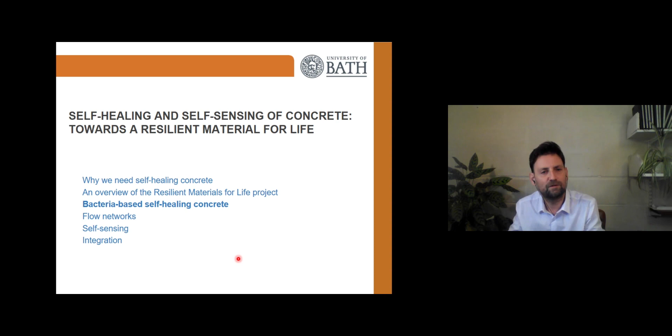So the title of my talk is Self-Healing and Self-Sensing of Concrete: Towards a Resilient Material for Life. The general content is as shown here. I'll start off with describing why we need self-healing concrete. I'm going to give an overview of the Resilient Materials for Life project from which a lot of this work has arisen. I'll talk about bacteria-based self-healing concrete, something about flow networks, self-sensing, and finally integration of self-healing and self-sensing. The bacteria-based self-healing concrete is shown in bold, as that's the main topic of the presentation, and the majority of what you'll hear is based on that.

Whilst I'm giving the talk today, I really don't want to proceed any further without making mention of the team at Bath that has been working on this area for the past 8 years through Materials for Life and Resilient Materials for Life. Some of the names on this slide will come up throughout the presentation, and certainly nothing that I'm presenting today could have been done without them. Essentially these 17 researchers are the co-authors of this presentation. Shown here are the academic staff, postdoctoral researchers and PhD students that have been involved with the research at the University of Bath. But even on top of this, there are many undergraduate and postgraduate taught students who have also contributed to this work on self-healing and self-sensing of concrete through their research dissertations.

So to start off with, I thought it might be useful just to define the problem. Why do we need self-healing concrete? Obviously concrete is weak in tension, and due to a number of reasons, it may well crack during its service life. This then permits the ingress of harmful compounds such as chlorides or sulfates that can cause longer term and serious deterioration of our concrete structures.

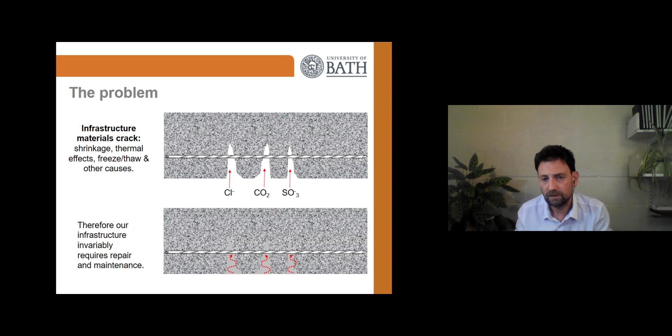Of course, you'll say, well, we know that, and that's why we maintain our structures, and we do invariably repair them from time to time. But I want to ask, do we really do that effectively? I'd suggest not, because repair and maintenance of structures has problems. Indeed, current figures for the UK, where I'm based, show that at least half of the construction budget is spent on the repair and maintenance of mainly concrete infrastructure, and that's around about £50 billion every single year.

But furthermore, these costs are compounded when the cost of disruptions, closing roads, closing railways, and other delays are considered. So the actual cost associated with repair and maintenance can actually be 10 times the actual figure of the repair itself. But actually, it's even worse than that, because the problem is many cracks start off small, so they're not spotted until they grow larger.

So there's been many years in which harmful substances have been ingressing into the concrete before you've even noticed that there is a problem. And then, even once you've noticed that there is a problem, you can't just go out and repair the crack, because it may not have been budgeted for. So you've got to wait for the client or the asset owner to make that money available, and again, that means many more years, perhaps, when these substances are ingressing.

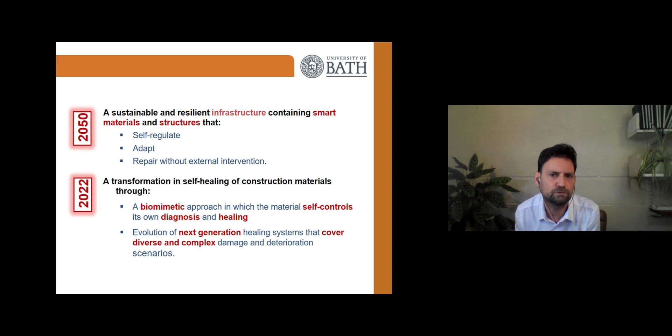Just waiting for the next slide to load up. Yep, there we go. It's got a video on it, so that's why it's taken some time.

So that's the RM4L programme grant at a much higher level. We've also had a short video created for us, aimed at the non-expert, which explains what we're doing in a rather more fun way. So we'll just show this for now, and hopefully it will play.

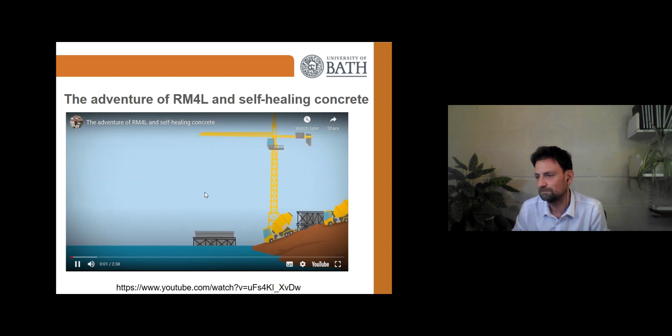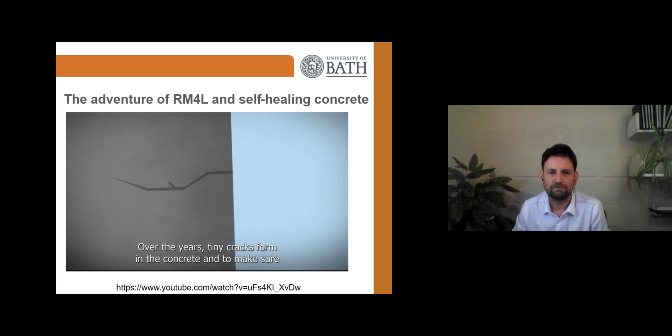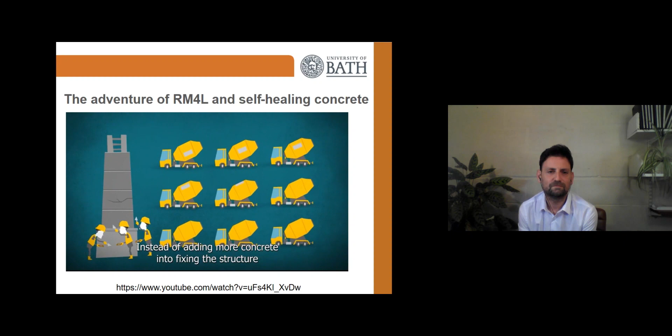One of the more polluting productions in the world is concrete structures. Over the years, tiny cracks form in the concrete, and to make sure the structures don't collapse, there is a need for even more polluting concrete production for maintenance. Researchers from Cardiff, Bath, Bradford, and Cambridge joined together in an adventure called Resilient Materials for Life, RM4L, and they came up with an interesting idea: instead of adding more concrete into fixing the structure, what if the concrete would fix itself?

RM4L is developing four main types of self-healing concrete methods. In the first method, microcapsules containing a healing agent are mixed into the concrete. If a crack forms, it will rupture the capsules, releasing the glue-like agent that will glue together the microcracks from within.

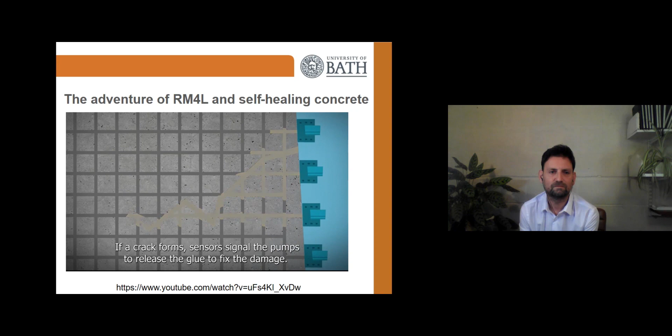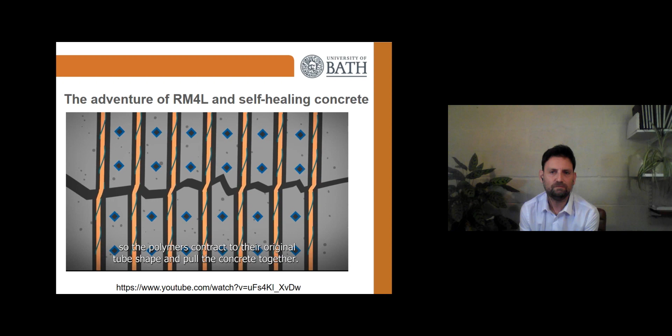The glue agent is also used in the second method. Tunnels are built into the concrete with glue pumps attached to its side. If a crack forms, sensors signal the pumps to release the glue to fix the damage. The third solution is a shape memory polymer shaped into tubes and built into the concrete. If a crack deforms the tubes, sensors placed inside the concrete will detect the damage and activate the polymers by heating them up, so the polymers contract to their original tube shape and pull the concrete together.

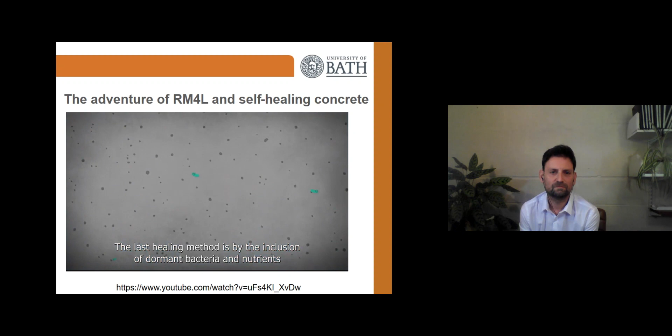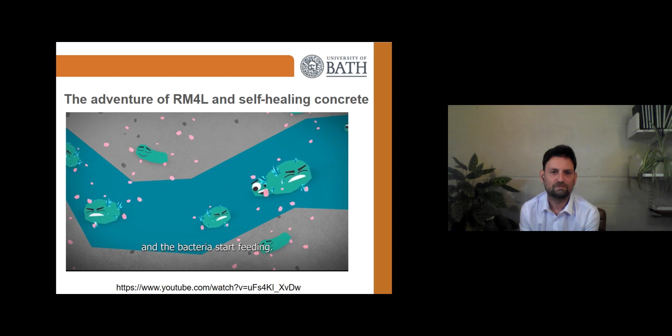The last healing method is the inclusion of dormant bacteria and nutrients in the concrete mix. If cracks form and water penetrates the concrete, the nutrients are dissolved and the bacteria start feeding. This results in the precipitation of calcium carbonate by the bacteria and leads to the sealing of the cracks. The bacteria can also heal historical buildings and monuments. Self-healing concrete could be one of the solutions of tomorrow to reduce concrete-based pollution.

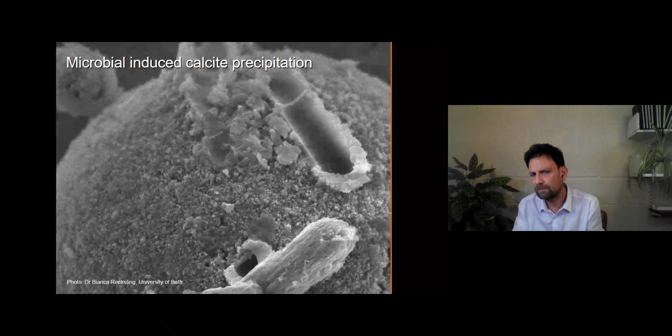Moving on from the video, as I said, at Bath we've largely been exploring this latter aspect related to bacteria-based healing. So I thought it might be useful to say a little bit more about how encapsulated bacterial spores work, how they can be optimized, and how they actually provide self-healing, given it's the area we've been working on so intensively. I'm going to explore some quick examples of work we've been doing, involving the fundamentals of bacterial growth, healing in colder conditions, some aspects of genetic engineering of bacteria, and a look at the availability of the growth media.

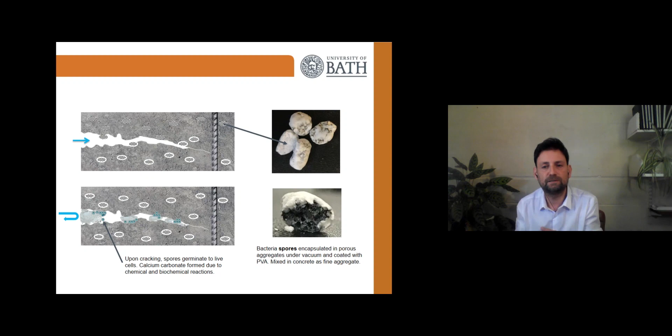Use of MICP for self-healing is fairly straightforward using bacteria. Essentially, we mix capsules into the concrete, and these capsules, often porous aggregates for simplicity more than anything, contain bacterial spores, and in some cases can also contain growth media. The general concept is that the capsule is roughly the same strength as the concrete, so should the concrete crack, the capsule will also crack, and at that point the bacteria spores will be released. Because of the bacteria chosen, they're released into an environment conducive for them to germinate, and they will then induce the precipitation of calcium carbonate through a series of chemical and biochemical reactions.

I'll briefly explain these chemical and biochemical reactions, as the use of bacteria does create some fear in the eyes of some concrete technologists. But it's really quite a simple process at one level. Essentially, bacteria are negatively charged on the surface, as I've tried to show here. This yellow blob is a bacterium.

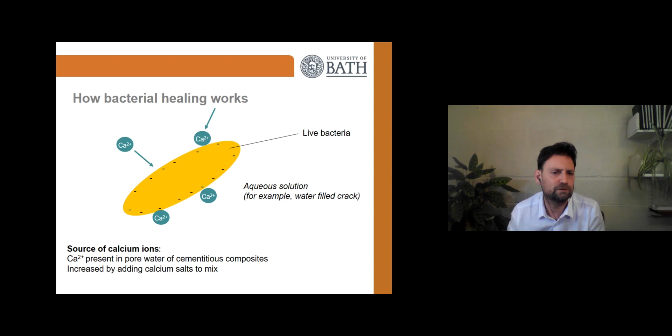They will attract free calcium ions in the concrete pore solution to their surface. Of course, there are many calcium ions in concrete. But we can also increase the number, and therefore facilitate greater healing, by adding further salts such as calcium nitrate to the mix, should we wish.

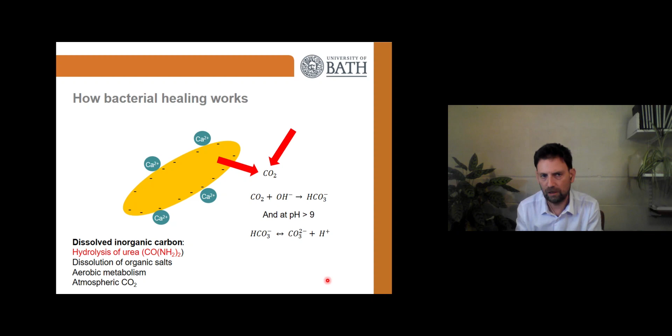In addition, the bacteria themselves are aerobic and will release CO2 into the concrete as a result of their metabolism. But we can also increase the amount of dissolved inorganic carbon in the concrete by adding organic salts, urea, or culture media. The addition of urea is important here, as only some bacteria, which we call urealytic bacteria, are able to break urea down. So you end up with two separate pathways: the urealytic pathway that uses urea, and non-urealytic pathways. I'll be exploring this a little more in a few slides' time.

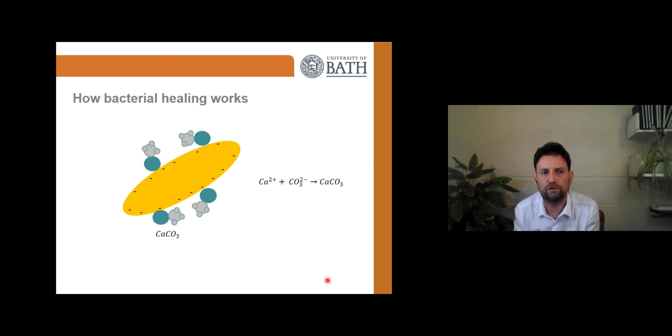Whatever the pathway, the presence of calcium and carbonate ions in the vicinity of the bacteria, which then act as a nucleation point, leads to the formation of calcium carbonate, normally in the form of calcite, on the surface of the bacteria, as shown in this image here, which you've already seen, but I didn't annotate it last time.

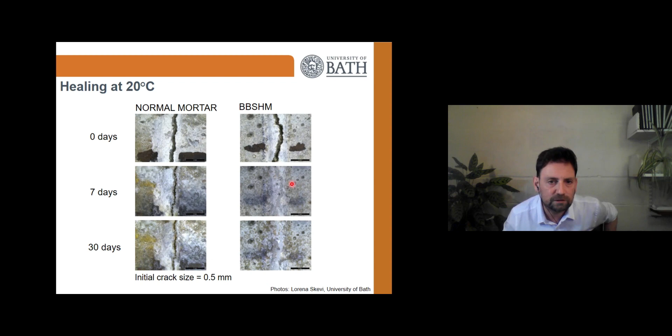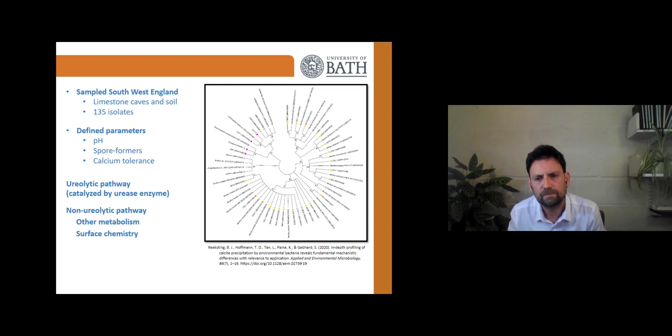Within those areas, we targeted spore formers that could tolerate alkaline conditions, typical of concrete. We also tried to distinguish our bacteria into ones that had ureolytic capability and those that didn't. This allowed us to investigate which pathway was most relevant to our self-healing applications. We investigated the kinetics of calcite precipitation and the total amounts of precipitate we could form, and correlated this to bacterial growth and changes in pH.

Perhaps more importantly, we saw that the ureolytic strains produced a much finer and more homogeneous powder than the non-ureolytic strains. This is consistent with the idea that they were probably formed purely as a result of saturation kinetics changes, whereas the non-ureolytic strains had large organic components embedded in the precipitate.

In terms of self-healing of concrete, however, which is what we were genuinely interested in, both the ureolytic and non-ureolytic bacteria were capable of closing cracks in the concrete. But interestingly, we found that the non-ureolytic bacteria, at least in the conditions we tested them in, worked slightly better, which was to some extent a surprise. But it has meant that this is the pathway down which most of our research has proceeded.

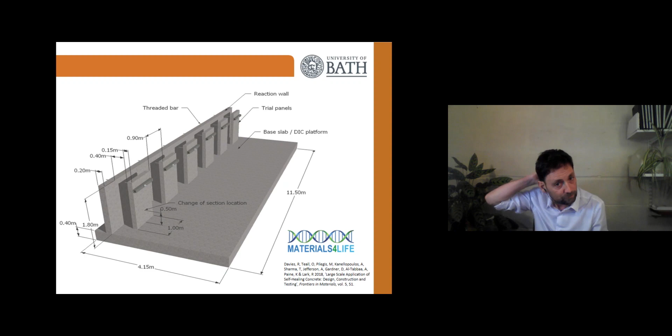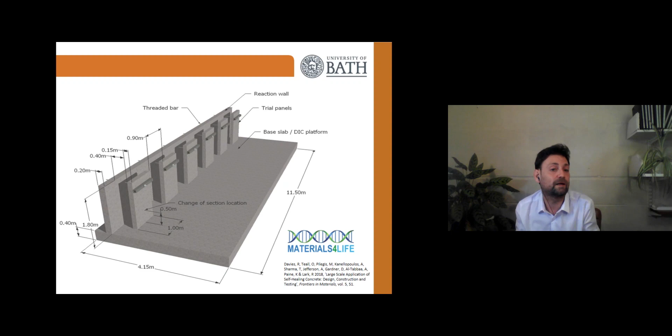As part of the earlier Materials for Life project, the M4L project, we were required to undertake a site trial to demonstrate that bacteria-based self-healing concrete would work in practice.

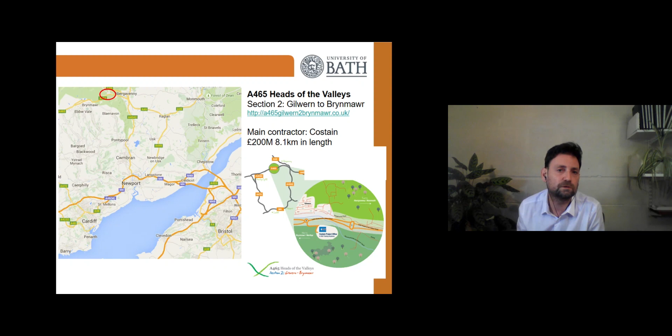The site trial took place in South Wales, in the west of the United Kingdom, and was carried out with the help of Costain, a major contracting engineer, as part of a major upgrade to an important link road, the A465 in Wales.

We did the work in conjunction with our colleagues at Cardiff and Cambridge universities, who were testing some of the other technologies I've already mentioned. Altogether, five walls were made, and one of those was used for our bacteria-based self-healing concrete technology. This wall is 1 metre wide, 1.8 metres high, and 150 millimetres thick.

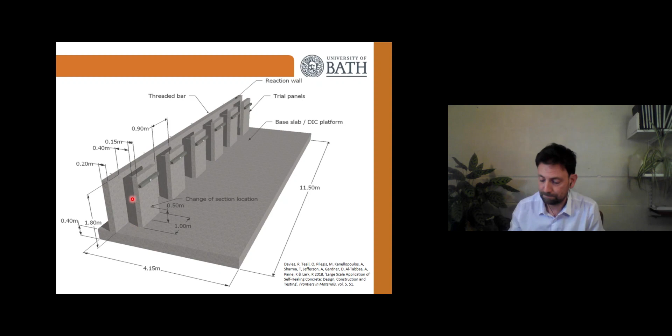Following a number of lab trials, we developed a concrete with the required design strength, appropriate consistence, and one that adequately provided self-healing in laboratory conditions. The mix proportions we used are shown here.

The self-healing component, of course, is coated perlite containing growth media or nutrients, and coated perlite containing spores.

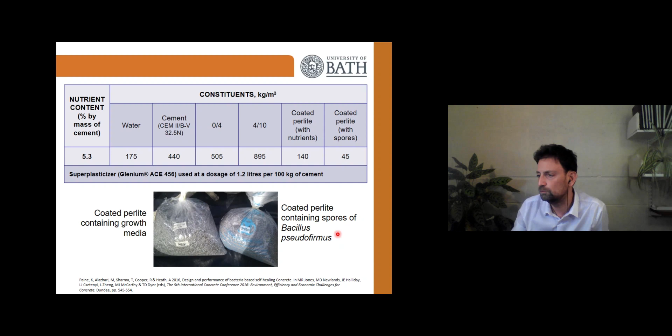The growth media was a mixture of calcium acetate and yeast extract, whilst the spores we used were Bacillus pseudofirmus, or at least they were known as Bacillus pseudofirmus at the time. I've noticed they've now been recently renamed Alkalihalobacillus pseudofirmus.

These spores were embedded within perlite, and the perlite itself was coated with a double layer consisting of sodium silicate and cement paste.

I think the only other thing to note about the mix proportions is that the cement we used was a CEM II/B-V, meaning it was a Portland fly ash cement.

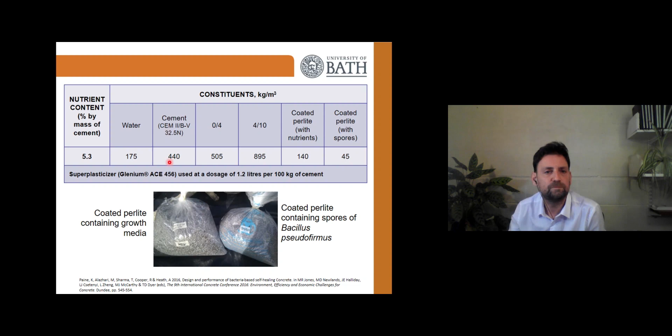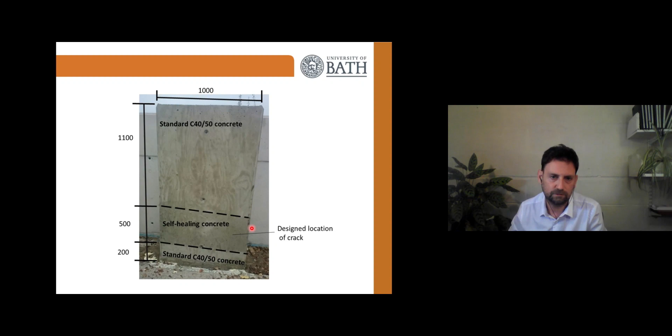Due to issues with actually making a large number of spores, we didn't necessarily have the scale-up capability at the time. We decided only to add the bacteria-based self-healing concrete in the area of the wall where we knew the crack would form. This was a section 500 millimetres in height, 1 metre in width, and again 150 millimetres thick, but we knew the crack would form somewhere just there.

I think this is important because, in general, what we were trying to avoid was this being simply another university lab trial where researchers have done this thing and it looks really good. What we wanted to demonstrate was that this was something that could be done on site, and that there was no reason self-healing concrete technologies could not already be available and done by contractors.

So therefore the vast majority of the work, other than the actual mixing of the bacteria self-healing concrete, was done by contractors from Costain and by a ready-mix concrete supplier.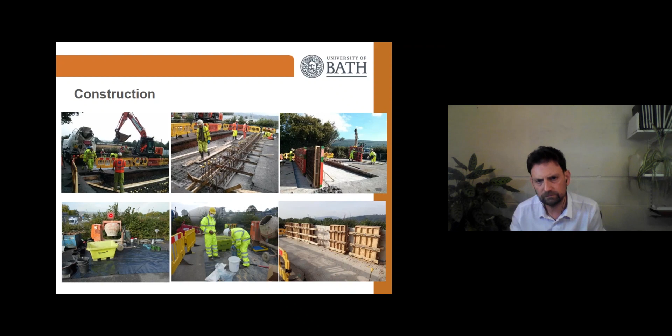This slide shows the finish that we achieved. In my view, and obviously I'm biased, but in my view the finish of the bacteria-based self-healing concrete here is better than that of the normal standard concrete provided by the ready-mix concrete producer. And that's either because I'm brilliant at making concrete, or it's because the self-healing agents improve the consistency.

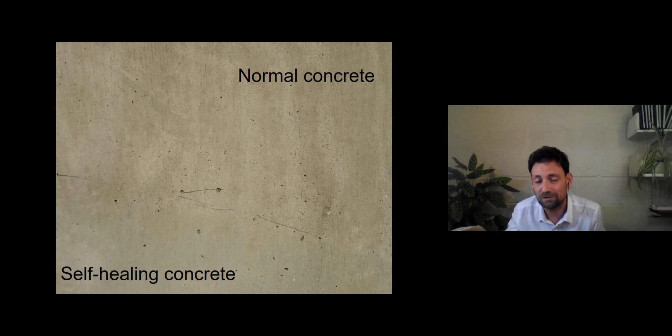Probably the latter. But this is important because when you tell engineers and clients that you want to add bacteria to their concrete, one thing they often worry about is what's it going to look like, what are the aesthetics. Clearly, the aesthetics of self-healing concrete are not a problem. It looks very nice, as good if not better than normal concrete.

So 28 days after we cast that wall, and the other walls at the same time, they were all deliberately cracked. This is different from many case studies on self-healing concrete, where they make self-healing concrete but never actually crack it, so you never see whether it will self-heal or not. In our case, the walls were cracked, then left to heal, whilst being monitored for 6 months.

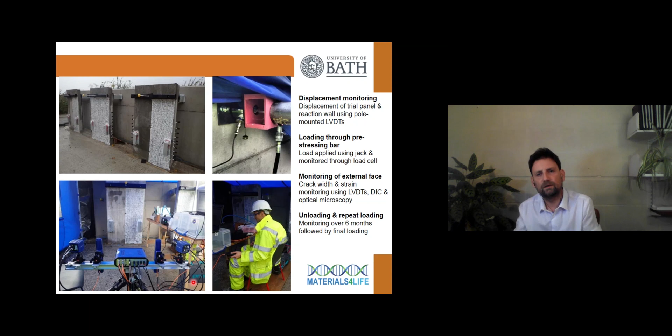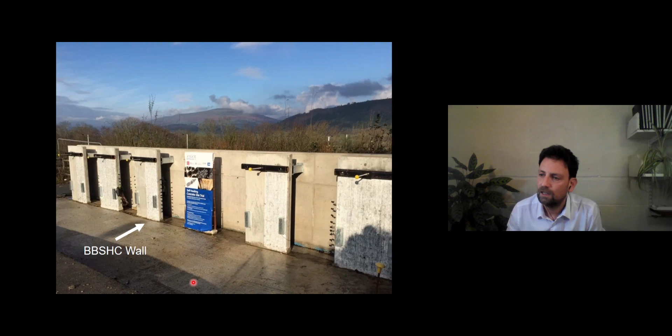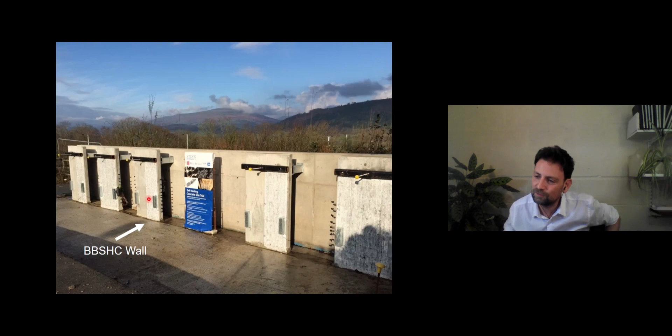Since the wall was cast, actually I haven't told you this, but it was cast in October, so it was then left for 6 months, exposed to a South Wales winter. And South Wales winters are wet and cold. This image shows the walls on a fairly nice day, but you can still see the crack there, and we were hoping it would heal.

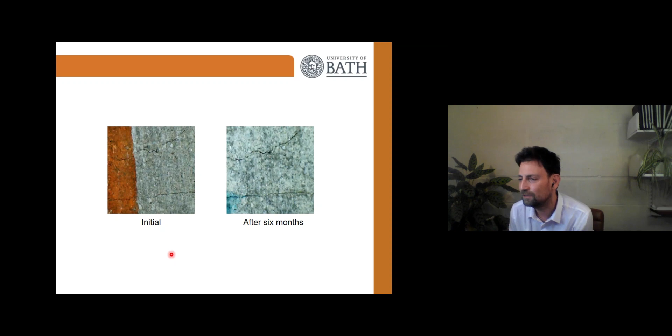After 6 months, we came back to see if all the cracks had healed, and oh dear, that doesn't look great, does it? The cracks are clearly still visible and don't appear to have closed at all. So what had gone wrong?

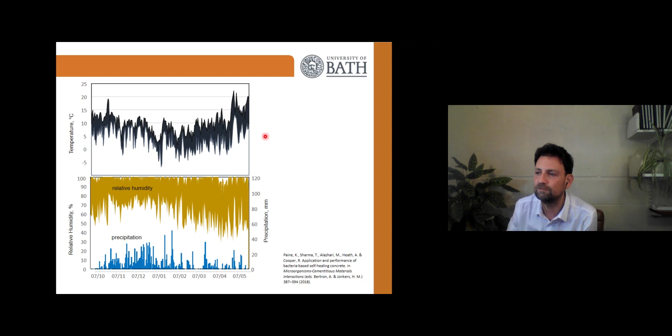Well, our chief suspect was temperature. Indeed, the average temperature throughout the site trial was around 7.5 degrees centigrade. And clearly a potential issue here was that we had used the mesophile Bacillus pseudofirmus, as many groups around the world do. Let's not forget, our use of that bacteria in the lab had been absolutely fine.

All concretes we'd made in the lab had self-healed. However, the problem with mesophiles is that in general they're not active below 15 degrees centigrade. Therefore, clearly in hindsight, and hindsight's a wonderful thing, it was never going to work in a wall in a South Wales winter.

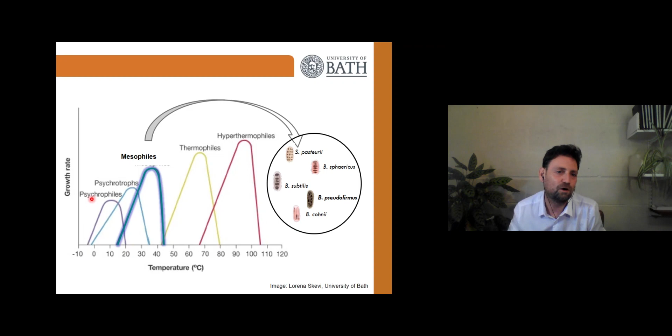Clearly what we should have used was a bacteria that would work at a lower temperature, such as a psychrotroph or even a psychrophile. So, that's a bit of history.

Let's now come back to the current research we're doing as part of RM4L, where we've taken a look at this aspect of performance. This slide shows bacteria-based self-healing of cracks in a mortar at 20 degrees C, symbolised by the red thermometer, and at 7.5 degrees, symbolised by the blue thermometer.

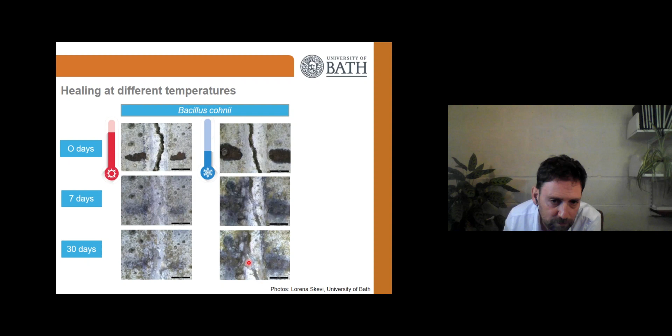Bacillus cohnii, which we've used here, is again a mesophile bacteria. What you can see is that the healing in the warmer conditions at 20 degrees C has been absolutely fine, the Bacillus cohnii have healed that crack perfectly. However, in the colder 7.5 degree temperature, the healing is significantly, well, it's non-existent. There's maybe a little bit of something there, but essentially the crack is still there. It's not worked, which is exactly the same as the situation we found with the site trial.

But consequently, one of the things we've done with that library of isolates I talked about before is identify at least one isolate capable of sporulation and precipitation in minimal media at low temperatures. One of these, which we've called Psy39, has demonstrated effective healing at low temperatures. This, of course, is incredibly promising for practical use of self-healing concrete, particularly in the UK, where we have this temperate climate.

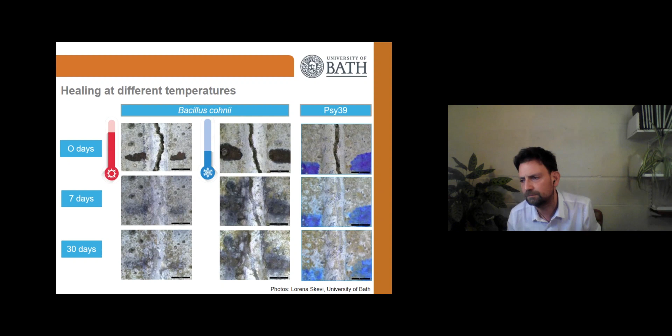And of course, indeed, the fact that we've found bacteria that work at different temperatures means we can consider making mixed communities of bacteria that permit healing over a range of temperatures. However, when we wrote the RM4L proposal back in 2016, we did have some concern that we wouldn't be able to do that, that we wouldn't find bacteria suitable for all conditions in which healing might be needed.

So we considered whether it would be possible to take, for example, a bacteria that thrives at low temperature but has no calcite precipitating capability, and then give it that capability.

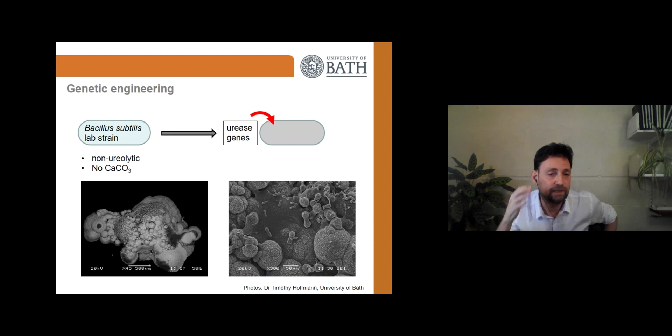So our microbiology team took a model organism, Bacillus subtilis W168, which has low intrinsic urease activity and poor calcite precipitation ability, and used that as a chassis, then added to it various genes from a better calcite precipitating organism, in this case Bacillus paralicheniformis.

Of course, this is the wrong type of conference to look at this in detail.

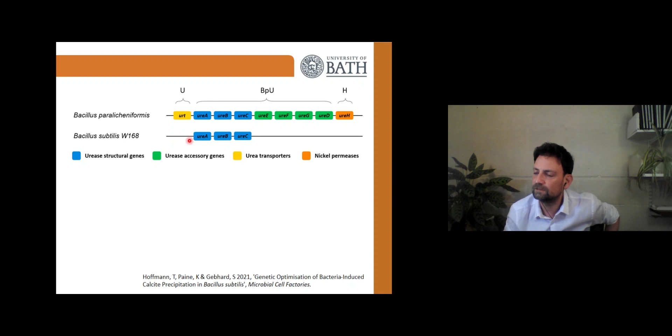But we can be clear that when we look at the genome sequence of Bacillus subtilis compared to Bacillus paralicheniformis, it has certain genes missing either side of the urease structural genes. Essentially, what we did was slowly over time add these genes back into Bacillus subtilis. Actually, what you do is take out their UAE structural genes and gradually put in that aspect, then that part, then that part, and then you can do one with everything.

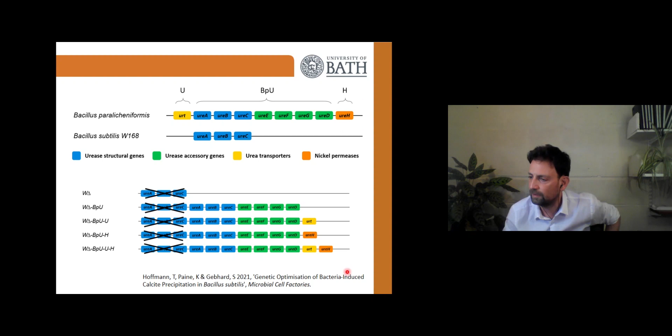And what we showed was that by adding these genes, you can get an increase in ureolytic activity, which is important in terms of the ureolytic form of calcite precipitation.

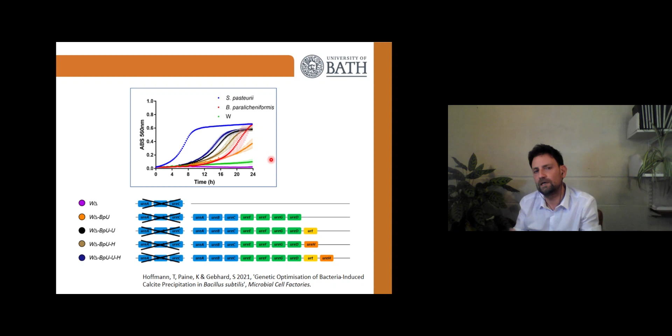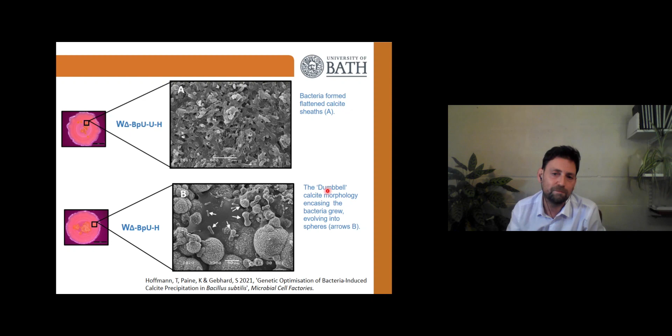We also looked at the calcite precipitation ability of these genetically modified bacteria, and it was really interesting to see that the morphology of the calcite produced is dependent on the urease genes that the bacteria had. In fact, you can get even these very interesting shapes of calcite, such as these flattened calcite sheaths and this dumbbell morphology as well. So that's the bacteria sorted.

We've got bacteria that can work at different temperatures, and if not, we can give bacteria that capability by genetically modifying them. What about the growth media?

Because of the way self-healing concrete works, we do need to ensure the availability of calcium ions to precipitate the healing of the concrete. One important question is, can we add the growth media directly, or does it need to be encapsulated, like I did in the site trial, for example?

This is an important question because the encapsulation of the growth media, which is a calcium salt and yeast extract for example, is problematic because it takes up space that could be used by much stronger aggregates. It also increases the cost of production, and it potentially limits the amount of healing that can be achieved because you can't get that much calcium into the concrete. Because of this, many research teams throughout the world doing self-healing concrete do not bother to encapsulate the growth media, and indeed we at Bath prefer not to do so if we can avoid it.

But perhaps we just need to look at exactly what's going on and understand how the growth media works. An essential element of the growth media, as I say, is the calcium salt. When you add that directly to the cement matrix, it dissolves and forms an excess of calcium hydroxide. It's the calcium hydroxide that forms the long-term supply and reservoir of calcium in the concrete for healing to take place, should cracking occur.

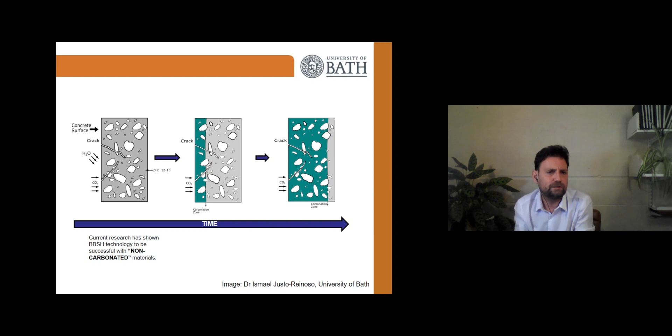But of course we know from basic concrete technology that should the concrete carbonate during its service life, then the calcium hydroxide will be consumed and turned into calcium carbonate. At that point, calcium carbonate is not in a position where it provides a reservoir of calcium ions. So the question is, do we still get healing if the concrete has carbonated?

We've looked at this as part of RM4L, and this slide shows the normal lab situation where the concrete has not carbonated. Here we can see the relationship between the healing of the concrete and time. We can concentrate on two self-healing concretes: one where the growth media has been added directly, the blue line, and one where the growth media has been encapsulated, the green line. You can see that we get healing in both conditions, so it doesn't really matter. In non-carbonated concrete, generally speaking, as used by most people in the lab, it doesn't really matter whether you encapsulate the growth media or not.

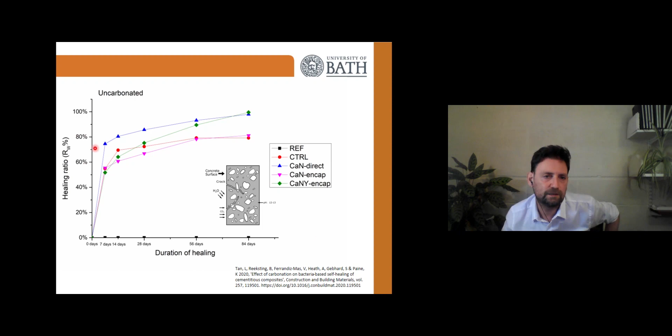You could argue, based on these results here, that the direct addition, the blue line, is a little bit quicker.

But the situation when concrete is carbonated is much different, and this is the situation where the concrete is carbonated before it's cracked. Here you can see again the same colour system: the blue is where the growth media has been added directly to the concrete, and you can see there's very little healing has taken place.

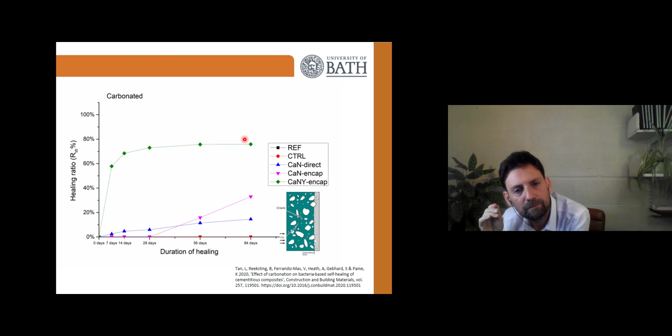So now the only effective way to get healing is, again, the green line, where the growth media has been encapsulated before being added to the concrete.

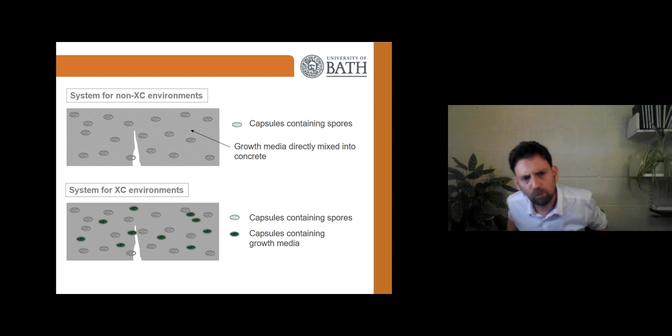So essentially what we've suggested is that you end up with two potential systems. You've got a simple technology consisting of encapsulated bacteria, used for concretes that don't carbonate before cracking occurs. Then you've got a more complicated system where you need to encapsulate the bacteria and encapsulate the growth media, needed where the concrete is likely to carbonate, in what we would call an XC environment in Europe.

But the fact that the growth media to facilitate self-healing may not always be available is, of course, a challenge. But we've kind of come up with a solution to that just now.

But there are actually further challenges with an encapsulated bacteria-based system. We need to acknowledge that the capsules can be quite large, so they won't necessarily distribute homogeneously throughout the concrete, and consequently there is a real risk that a crack may miss them entirely.

People have been looking at using microcapsules as a means of solving that problem. In fact, we've done that at Bath as well, but that again increases the cost of making self-healing concrete.

There's a further problem: if you've got an encapsulated system, the quantity of bacteria and growth media is fixed, and therefore it's liable to run out. Now that may not be a problem if a single crack forms and that crack heals, end of story. But what if the crack occurs and comes back? What if you've got a situation where there can be repeated cracking? You're not going to be able to get repeated healing potentially in such a scenario.

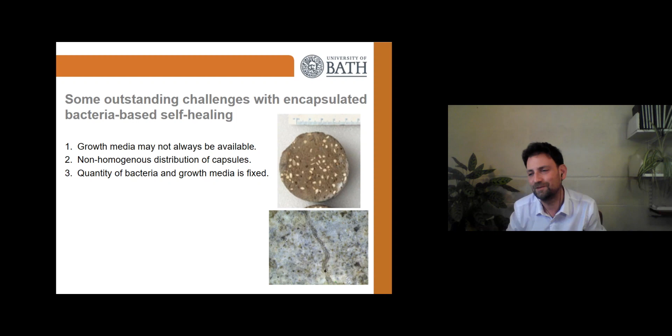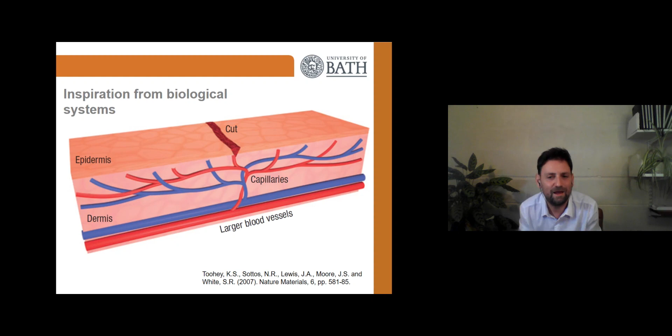So at that point we can say, well, hang on, let's take a step back. What are we actually trying to achieve here? At the start of M4L and RM4L, we were inspired to develop self-healing concrete based on a biomimetic approach. But of course the human body, and that of other higher animals, does not contain finite amounts of healing material contained within capsules. We have a vascular network that runs throughout the body, that's constantly topped up, and that can deliver healing wherever we should happen to cut ourselves. And there's no reason really why we couldn't use such a system in concrete.

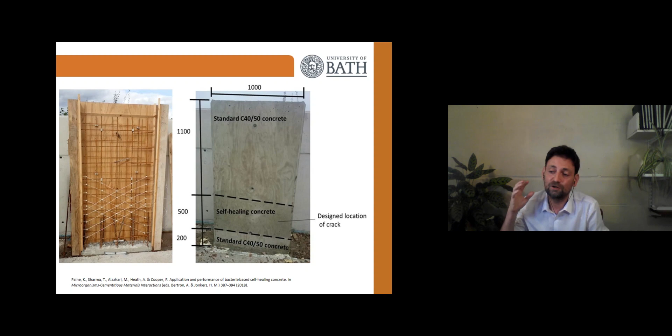This picture shows how such a flow network could be installed in concrete using shrinkable polymers, something my colleagues at Cardiff have been researching quite significantly. As part of the M4L site trial that I described earlier, Cardiff actually put into our bacteria-based self-healing concrete wall a vascular network that would have allowed us to put further healing materials, which could again be bacteria and growth media.

Additional bacteria and growth media could have been pumped or allowed to flow to the site of the crack and instigate either the healing or top up the healing that we've already achieved. Personally speaking, I think that a vascular flow network is a brilliant approach to the problem of self-healing, because it's so much more biomimetic, much closer to the way humans and animals solve the problem.

But one of the challenges, a major challenge with using vascular flow networks, is that they may require some human intervention. For example, we can only pump our healing agent through a vascular flow network if we know that the concrete has cracked. This brings us back to our earlier maintenance problem and the fact that we don't often spot cracks in concrete because they're small, and we don't spot them until they're much larger, and therefore at that point releasing the vascular flow net might be too late.

What we need is some way of being able to release the healing agent through the vascular flow network at the moment the crack first occurs.

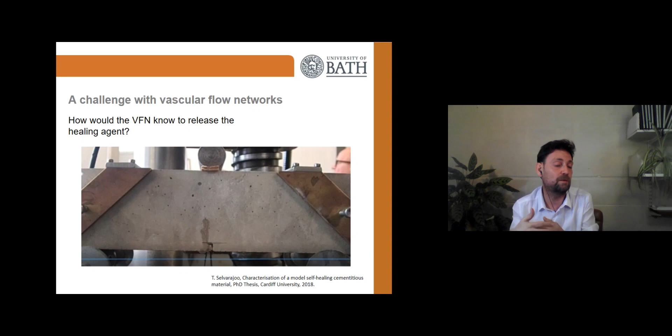So something we've been working on at the University of Bath, again through RM4L, is to try and integrate the flow network with a self-sensing system, such that the concrete intelligently recognises that it has cracked, and responds itself by diagnosing the crack and then effectively activating the healing system. I think this brings us much closer to having an intelligent concrete that can sense, reason, and respond to its environment. And of course, this was the ambition that we've set out for RM4L for infrastructure in 2050.

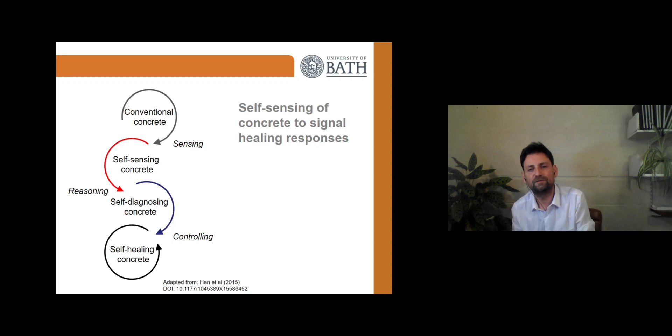To obtain concretes that recognise they've cracked—self-sensing, self-diagnosing concretes as we call them—we've used two methods, both based on the electrical properties of concrete: external sensing using piezo sensors, and intrinsic sensing using carbon-based powders and fibres.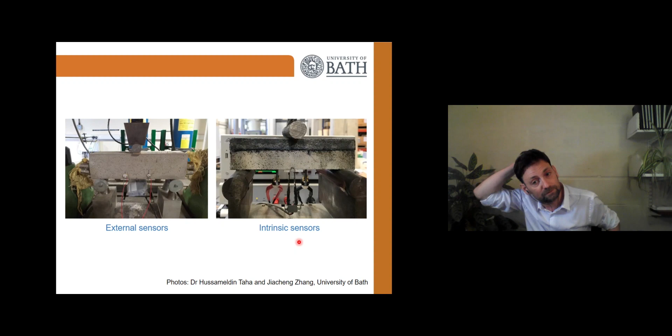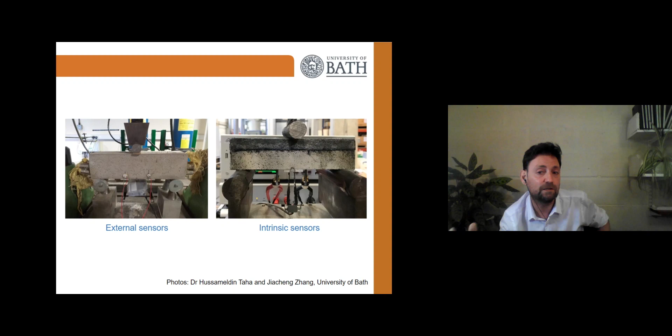Initially, and what I'm going to describe right now, is the work using PZT sensors, because that has so far proved the most successful in identifying cracks, and also in identifying healing.

This slide shows typical piezo sensors and how we attach these to the concrete, at least in lab conditions. We still need to prove this in real conditions yet. We can crack the concrete in bending, and if we wish, we can even simulate healing by using compression.

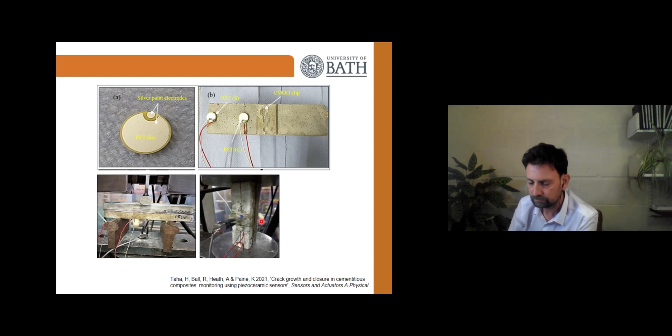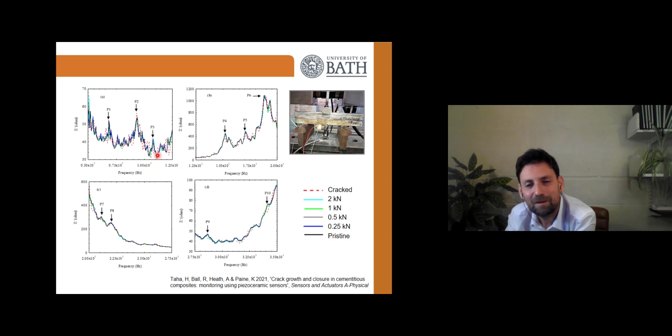You're possibly looking at these images right now and saying, well, I can't see any difference. Yeah, okay, because the changes in the impedance are actually quite subtle. But with some quite innovative analysis and computation, you can read a lot into these responses.

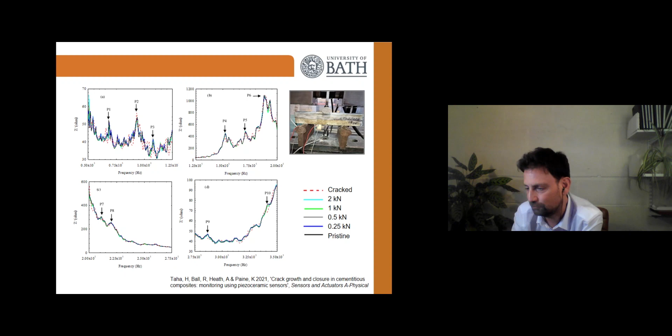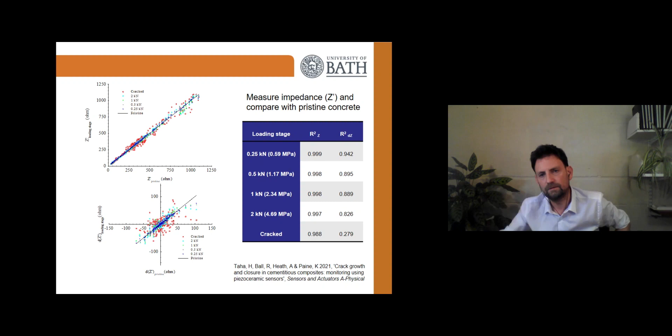This can be used to autonomically self-heal any cracks in the concrete. But as it's doing that, it can be monitored by the sensing technology. And if it's considered that the healing is not sufficient, because of differences in the impedance response, as we've just discussed, then the embedded flow network could come into play.

The sensors could trigger the remote healing agents—such as oxygen, growth media, further bacteria—to be pumped to the site of the crack to assist the bacteria-based self-healing concrete. Then it goes back through the sequence again until the self-sensing system says the healing has now occurred and everything can stop.

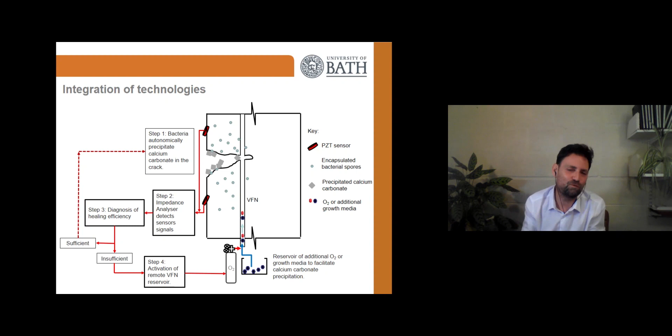As I say, that's one way to do it, and there may be simpler solutions. So at that point, I'm going to conclude and state that some of the work we've done has demonstrated that the use of bacteria is a reliable way of recovering the performance of cementitious composites after cracking. However, it's necessary to consider specific environment and exposure conditions when selecting the correct bacteria and growth media.

Bacteria-based healing can be complemented with vascular flow networks and self-sensing capabilities in order to maximise the healing capability. So that's a tour of some of the work we've been doing at Bath on autonomic self-healing of concrete as part of our RM4L research. As always, thanks to our colleagues at Cardiff, Cambridge and Bradford universities for their contributions as well.